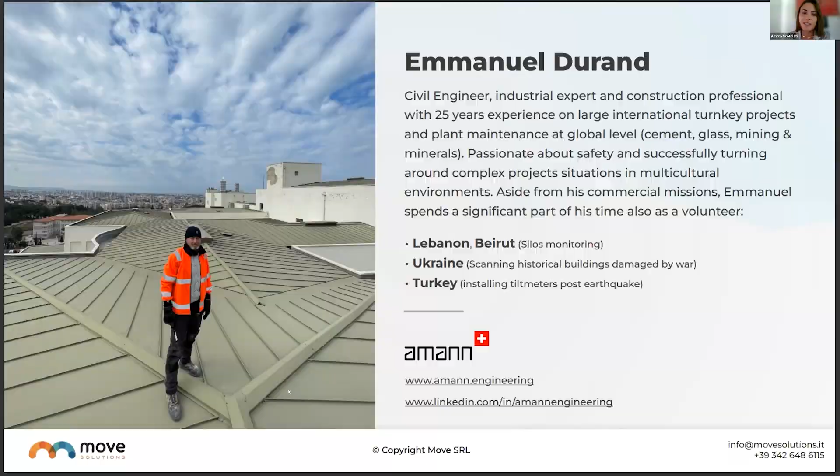Today he will go through the monitoring of the Beirut silos, and in particular why they needed to be monitored, how he decided to meet those needs, what instrumentation he used, and what results he managed to achieve.

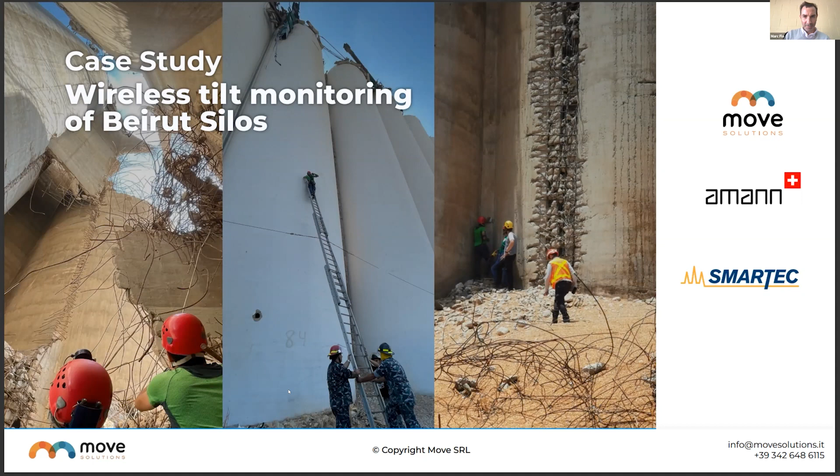Thank you Umbra, thank you so much, and thank you also Emmanuel. Let me share and we can then continue. Okay, is it correct? Yeah. Yes, that's fine, okay.

As you mentioned Umbra, I'm a sales manager for Move Solutions. I want to do a brief introduction of the company and what we do. Move Solutions is an Italian company that designed a wireless system for smart structural health monitoring. We provide the most innovative IoT solution for both static and dynamic applications on civil infrastructure works and needs, like general construction, bridge solutions, and railway or infrastructure monitoring.

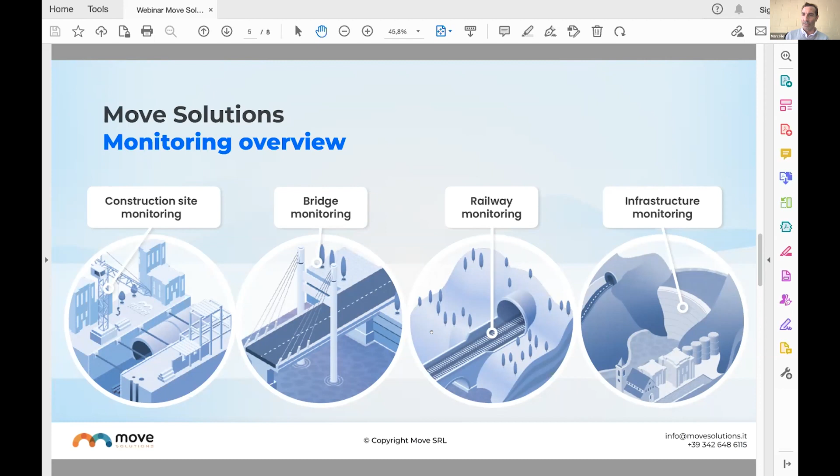We provide the hardware and the software, so we provide different sorts of wireless systems and sensors. We have a plug-and-play system for low-cost installation, and also low maintenance cost, as our battery lasts from 2 to 8 years.

About data analysis, as we will see later with Emmanuel's case study, we work in a very user-friendly platform with useful tools, functions, and graphs that really support in a very easy way all the data that we need to study in real time, real monitoring, and at the same time offer real-time alerts.

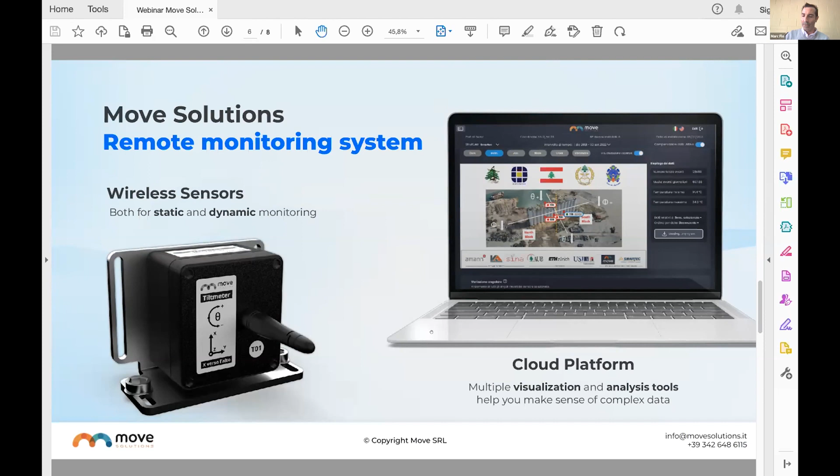As a system architecture, let's see this picture, where we can see perfectly how our system works. We have our sensors installed at the beginning. We work under the LoRaWAN protocol technology connecting to the gateway, and through the gateway we send all the data to our servers where we use our own algorithm to process the data, and then show all the data analysis on our own cloud platform.

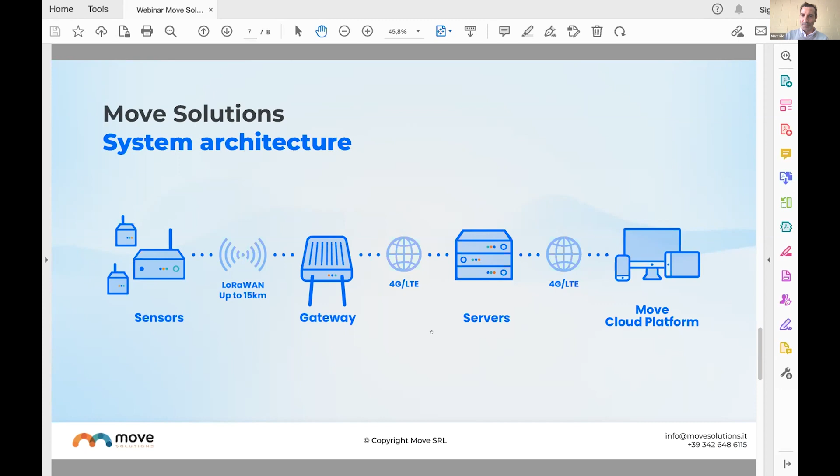We can also export the data from our servers with different kinds of connectors for specific integration into different platforms. So from my side, we can now go through the case study with Emmanuel. Thank you, Emmanuel, again.

Please. Thank you, Mark, very good presentation.

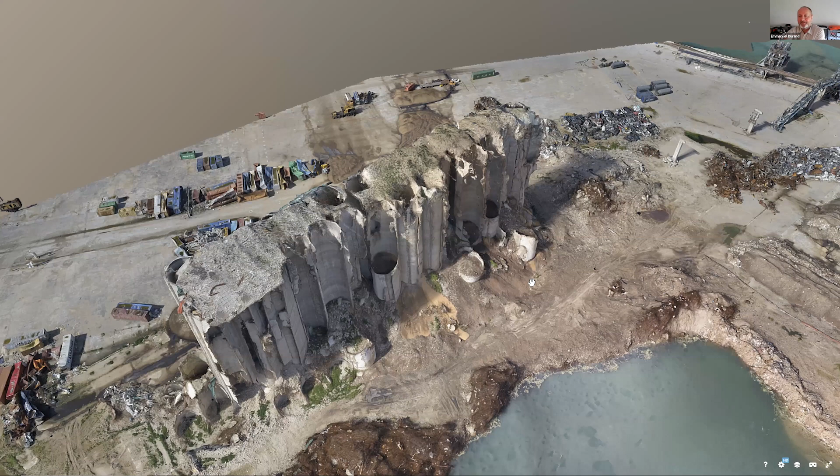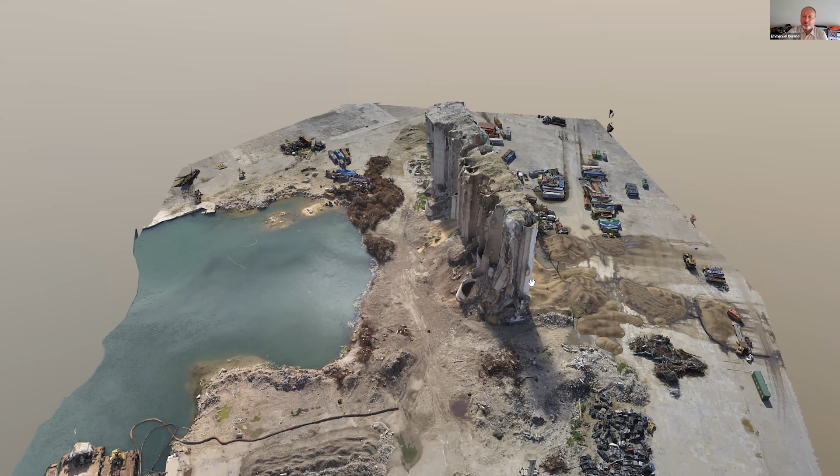Let me share my screen. Here you can see a 3D model of the port silos and the explosion site. Just to give a bit of background: on the left, this crater is the site where the explosion actually occurred. It was an ammonium nitrate explosion that affected the town, and for today's topic, it affected the silos. Actually, the silos acted like a shield protecting part of the city from the explosion. But as you can see, and as everyone has seen in images of this terrible explosion, the damage was really incredible.

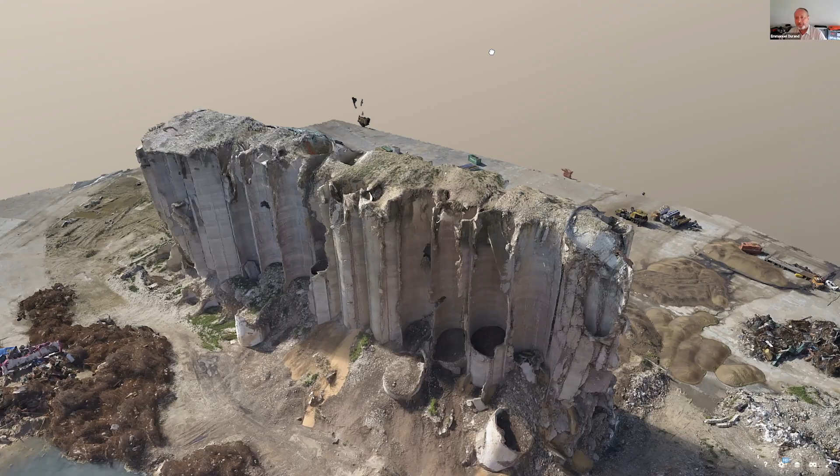When I first went to Beirut, it was not directly for the silos. I was working in town with a group of students providing support to the authorities. But then quickly, because this is my field and experience, I was in contact with the Lebanese army, and I offered to support specifically at the silo site with laser scanning.

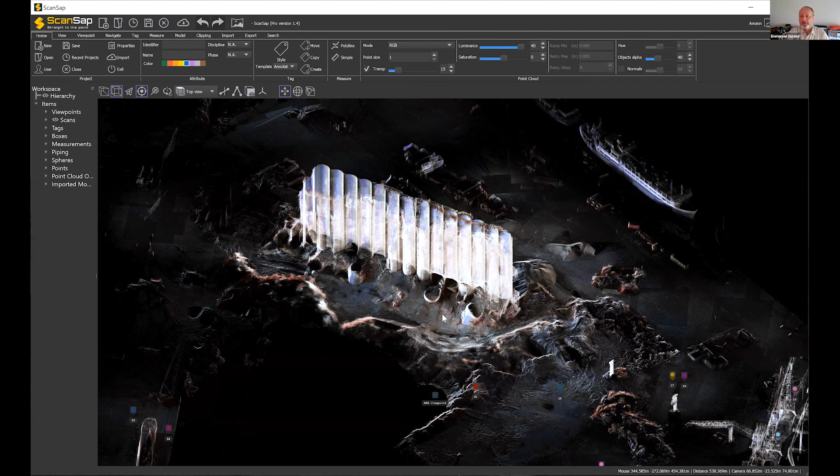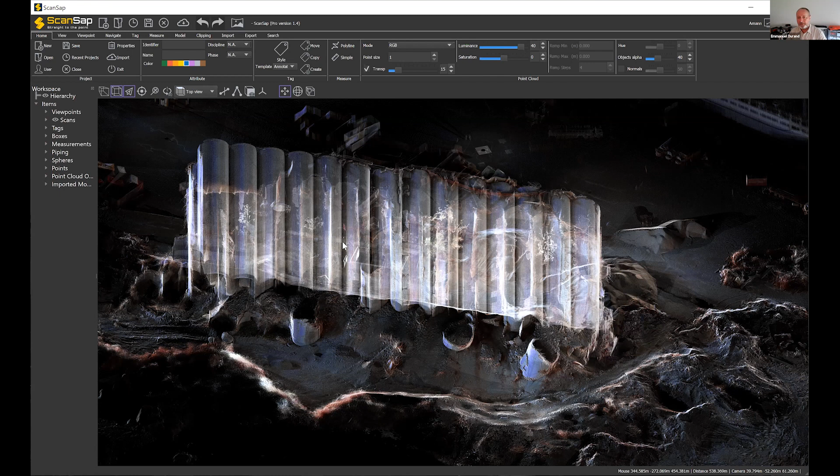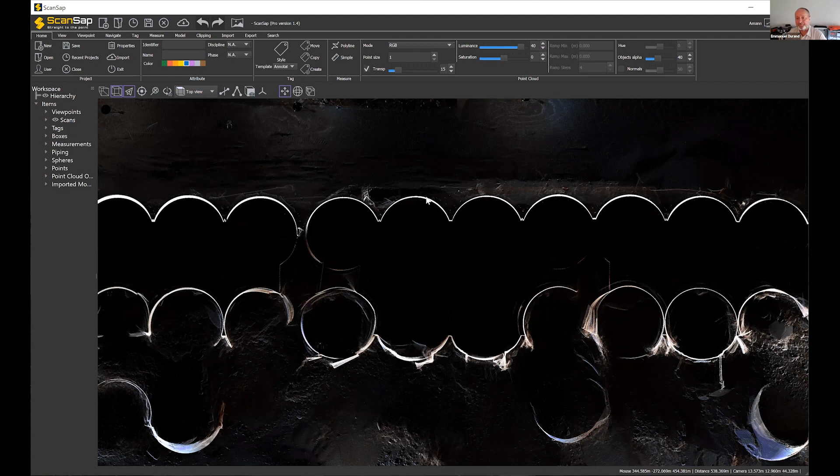This is a more precise technique of visualizing a particular scene. I use this laser scanner device, or 3D imager, positioning it all around the silo site and then combining the data together. When I did that, I found out immediately that the silos were not only damaged, but also got hit from the explosion, and were actually inclining, which we can see here—though I'd need another webinar to fully explain.

Basically, the silos we can see here in the plan view were like a body, or soldiers—I used to compare them to soldiers. We had 3 lines of silos, and the first line was totally destroyed by the explosion—it's this line here. The second line is the most visibly damaged. So all of this is moving. That's what I found at that time, just 3 weeks after the explosion.

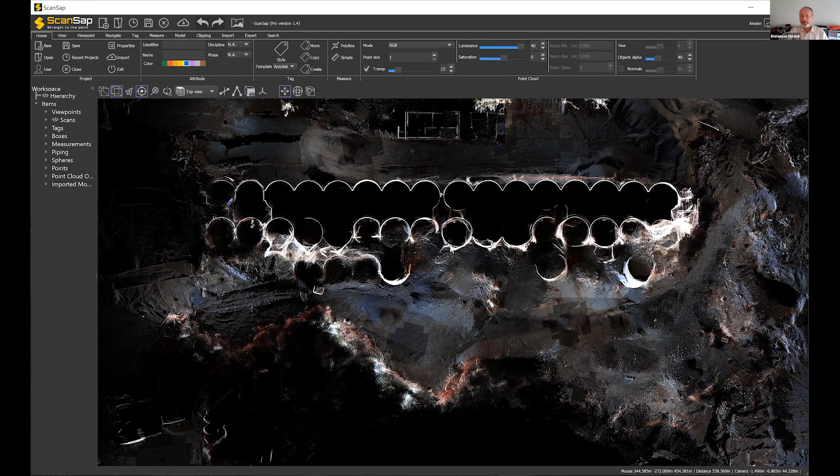From that point, as a structural and civil engineer, I knew it was important to follow that inclination. So I came back to Beirut multiple times, and I was elaborating reports for the group I was working with at that moment, with the Lebanese government, issuing reports such as this one.

Here again, I won't go into too much detail—it's a technical report, which I'm happy to share; it's public. But basically, what you can see in this first graphic image, based on laser scan, is showing the movement. At that time, I showed that the Beirut port silos, which were built in two separate phases like two buildings, had one part that was not moving over time, and another part, here on the left, that was moving, and moving fast—fast from a structural point of view, like a few millimeters of inclination every day.

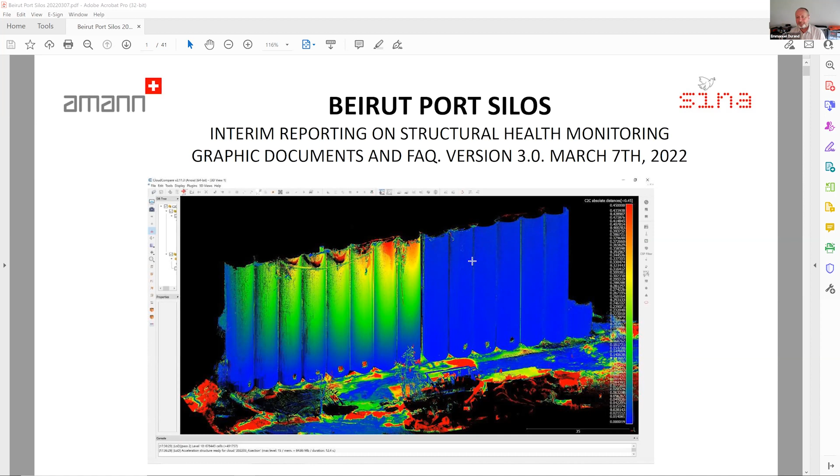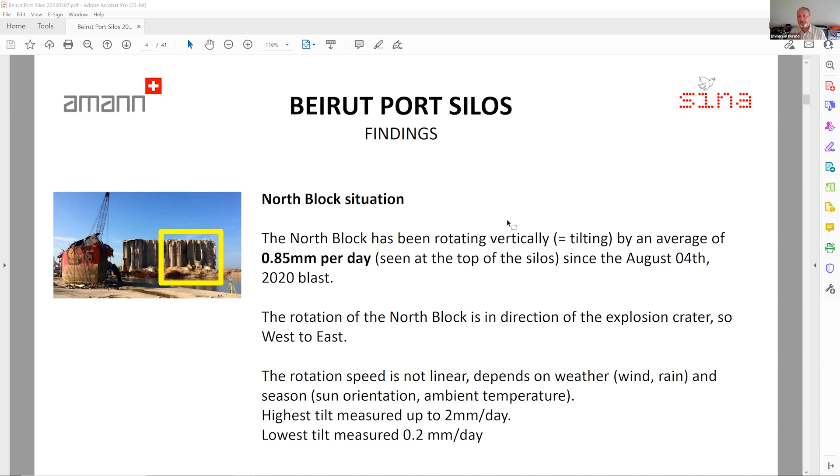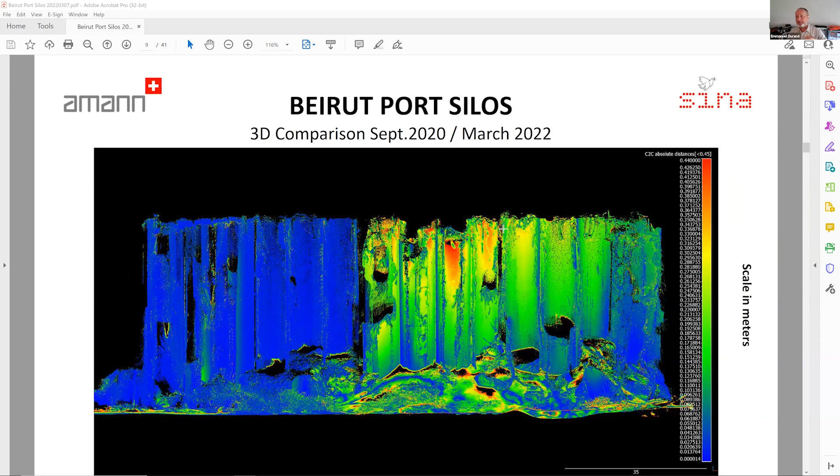From that point, because I wasn't able to come to Lebanon every week or stay a long time—my presence as a volunteer is always limited, I do the best I can, but I also have my family and my work—I kept traveling to Beirut, but I was also always looking for a system that could provide permanent monitoring, more precise, all the time, day and night.

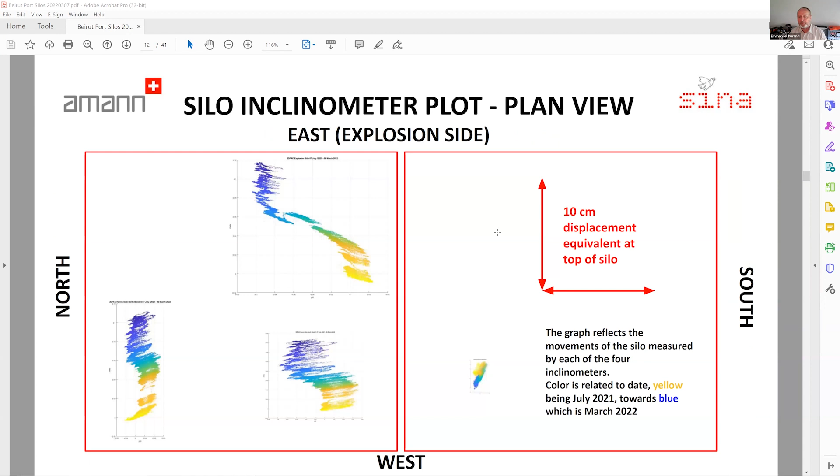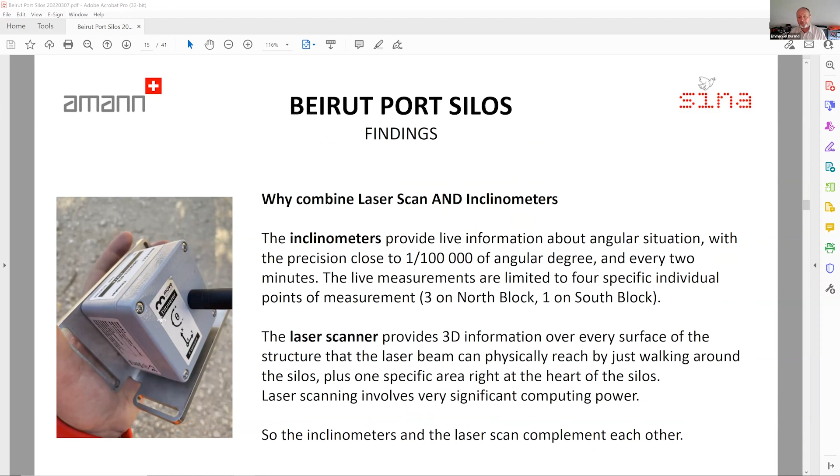I knew from school, and because that's my field of expertise, about inclinometers, but I had never used them in my professional work. I quickly got in touch with Move Solution through their partner Smartec in Switzerland, and we quickly agreed on 4 devices. You can see here the device, and then I installed it.

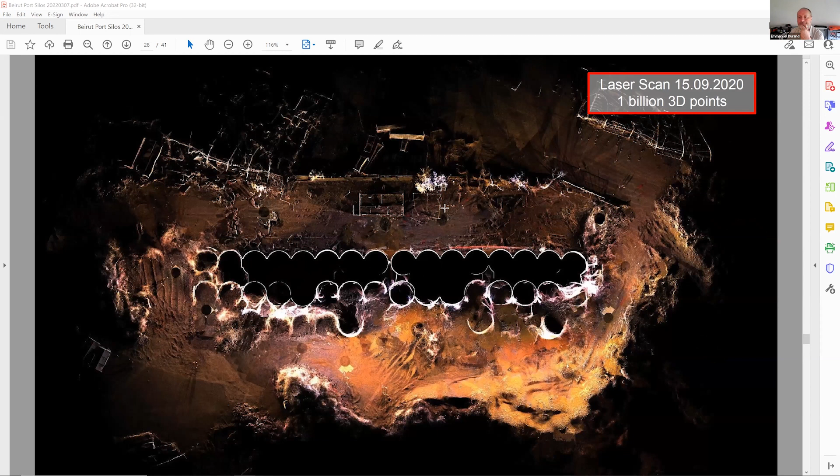So here I'll just go through the report—you can see these are graphic documents from my laser scanning, top view. Again, this is the view from the top; I made this one just right after the explosion. Different graphic documents here—this is the section of the building, and I explain in this report why the silos are tilting.

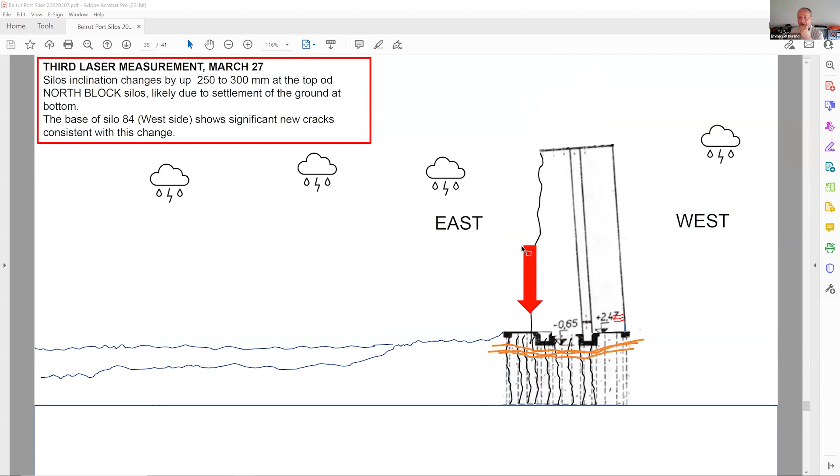Then we come specifically to the cloud platform. What's very important to understand is that the sensor—in this case, the triaxial tiltmeter from Move Solution—is a totally autonomous device. It doesn't need any cabling, doesn't need any external source of power. I'll show some pictures after. Basically, you just need to fix the device with some special screws to the structure, and that's it. The device emits a signal of inclination with a precision of almost one hundred thousandth part of an angular degree, which is just incredible precision.

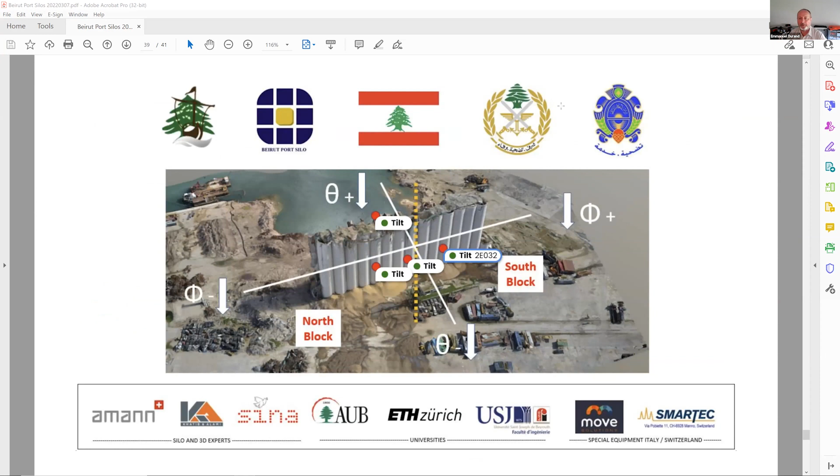And actually, it is still working in Beirut because it lasts so long and it really crosses any building. In this case, it's sending the signal to a router we have in town in Beirut, and the router is about 1.2 kilometers away, and we have no disruption of signal. So it really works very well.

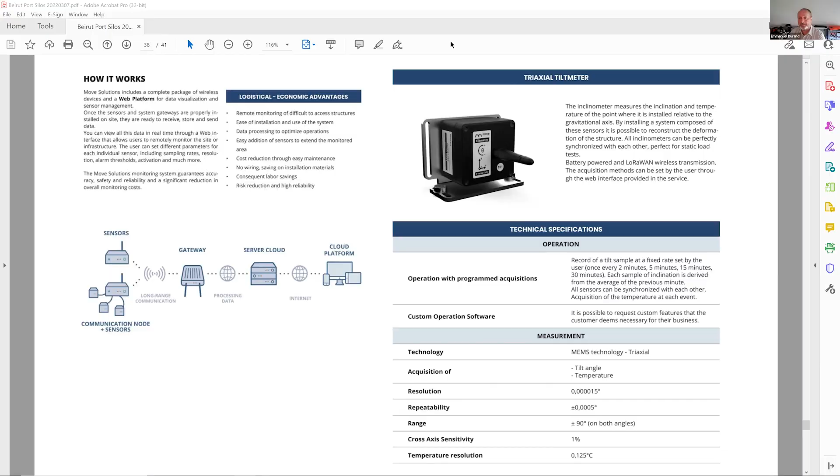And then the router, which is in town, needs some power supply, or it can also be powered with a solar panel in some cases. And it has a SIM card inside. So the router will receive signal from any kilometer and send it to Italy. Why that? When it sends to Italy, then we can get any signal directly on the platform, on the Move platform, which I will show now.

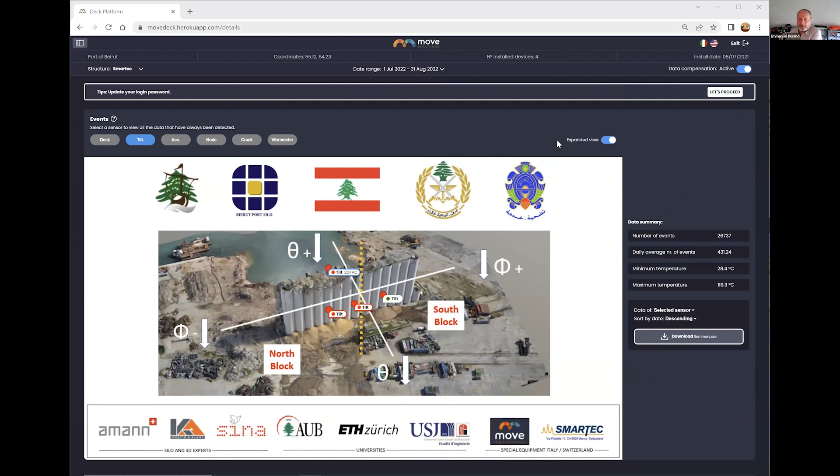So in this screen, you can see, actually we are live on the screen now. And on this page, we have all the different actors. So this is the owner of the silos, the Ministry of Finance, Beirut Port Silos, the state, and these are army components, the Lebanese army and the general security. They have been providing us with a lot of support for the installation. And then all the different actors from Amann, local and foreign universities, and of course, Move.

So here we have our different sensors. I installed 4 in Beirut. We have them here, and to get the signal, we just click on every signal. What's important here is we can see, for example, on this one...

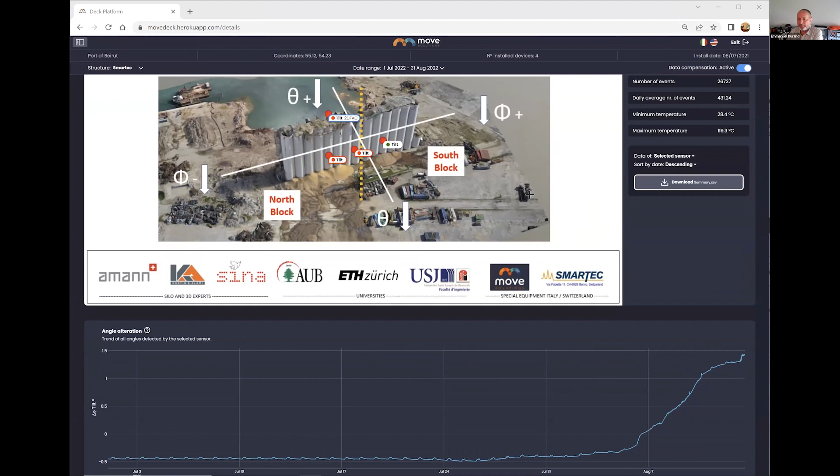The sensor was really key in identifying the problem in the silos and the acceleration of the tilt, which is exactly what I was suspecting. So I decided to install the inclinometer because my laser scan measurements were showing an increase in the tilt, as I said before. And when you have a tilt, you always try to find out whether it is stopping, or on the other way, accelerating. As civil engineers, we worry about an accelerating movement, which generally precedes a collapse.

And that's actually what happened in Beirut. We can see on this sensor here in July, okay, it's very small, but we can see here the angle. So we have 3 graphics. The first is inclination, like this. The second graph is the inclination in the other axis. And then we have the third graph, which is temperature, the temperature of the structure in contact with the inclinometer.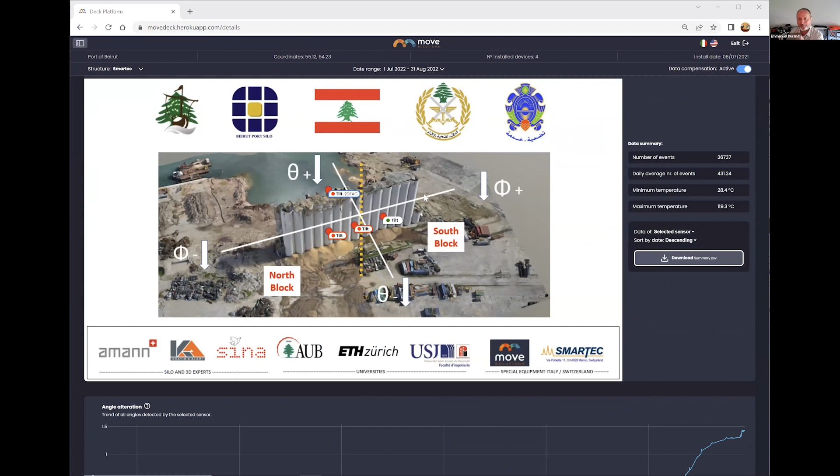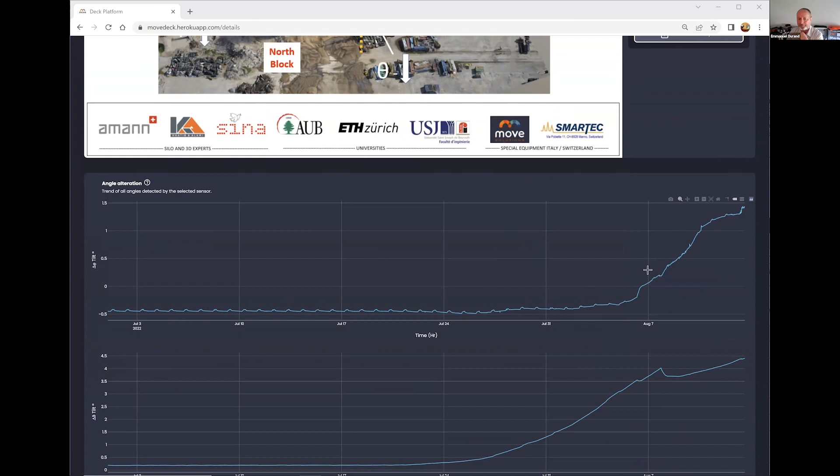So in Beirut, we have 4 sensors, and every one of them is a story in itself. If I go quickly, this one here is on the crater side of the silos. And we can see here it was getting up and up the signal until at some point the silo reached 4.5 degrees here, which was already very, very big. That's already more than the Pisa Tower.

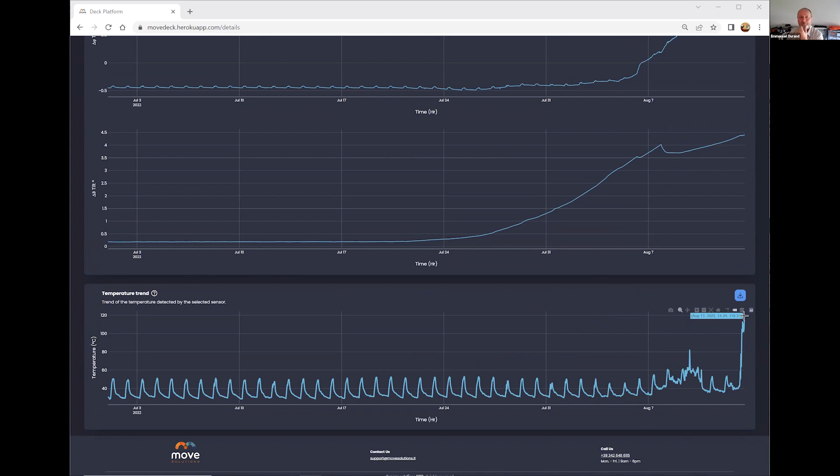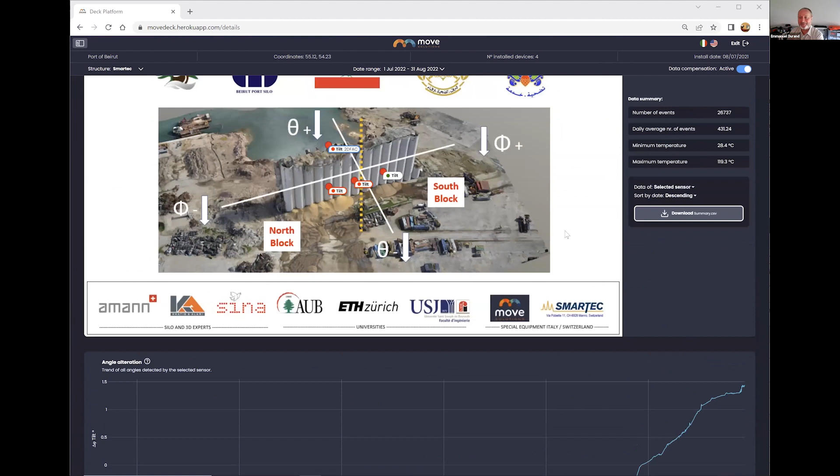But what's interesting here is we had the temperature, and we can see it reached 120 degrees because unfortunately this sensor burned, as there was a fire at that time. So this sensor died, but it did the job until it died.

And then we have this sensor, extremely interesting also. I'm just loading now. You can see the loading is quite fast. Here, this is the angle. We can see in July last year, we had like 0.02 degrees, 0.02, very small, but still going up. And then at some point, the inclination starts going to 1 degree, 2 degrees, 3, 4, really fast.

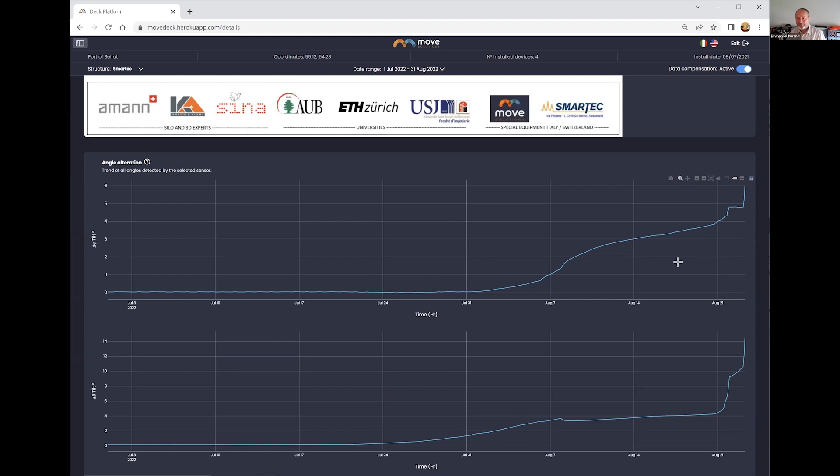So it's actually, and we can see an exponential curve on both angles, either on this side or this side. So you can see the first curve here or the second curve here, especially in the last moments, that's the last night. You can see here this 0, 0, it's midnight. And between midnight and here, it's 6 o'clock, it went from 10 degrees to 15 degrees.

Then you know it's finished and you know it's going to go. I will not show here, but you can see on the internet—just search Google for Beirut silo collapse—and you'll find videos. There are so many videos with the live collapse of the silos.

What is very important to say at this point of the discussion is why we are doing all this and what's the benefit. In this case, in Beirut, the benefit of all this structural health monitoring—first with the laser scan, but then with this day-to-day, minute-per-minute monitoring with the Move Solutions tiltmeter—is that I was able to tell the authorities with certainty, 100%, this is going to collapse. So please remove any people in the vicinity.

When the silos collapsed, we actually had 3 successive collapses: on 31 July, on 4th of August, and on 23rd of August. Every time I was able to warn the authorities and they were able to secure and evacuate the area. So the silos collapsed, but no one was killed and no one was injured. That's really the benefit—it's really a life-saving tool. On the technical, scientific point of view, there are many other benefits, of course, but this is really the key.

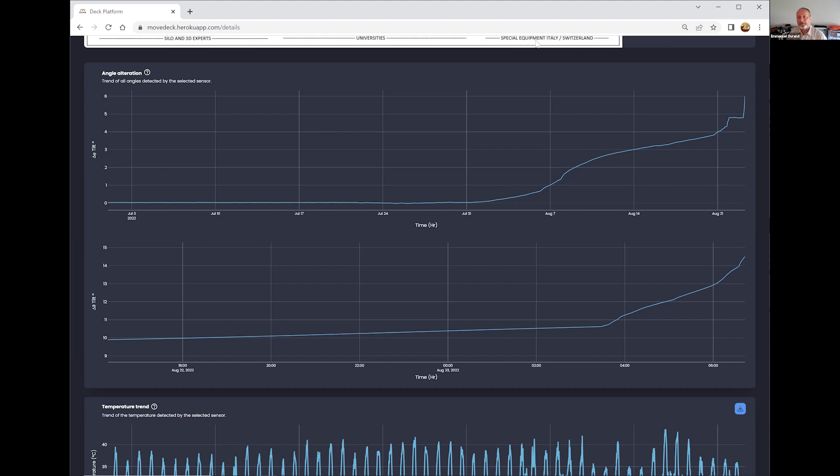Just recently I installed, again—we will do another webinar for that, I guess—a tiltmeter in Turkey on hospitals, and here also it's a life-saving thing. I will just finish by showing some pictures from the installation, which is also something I can share at a later stage.

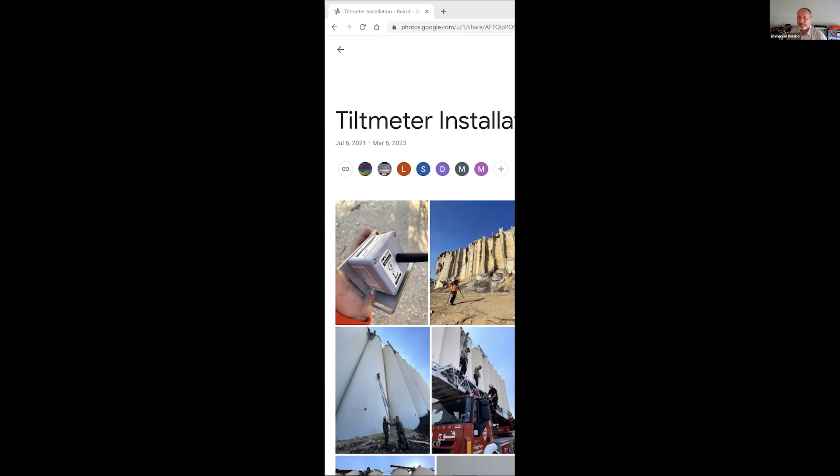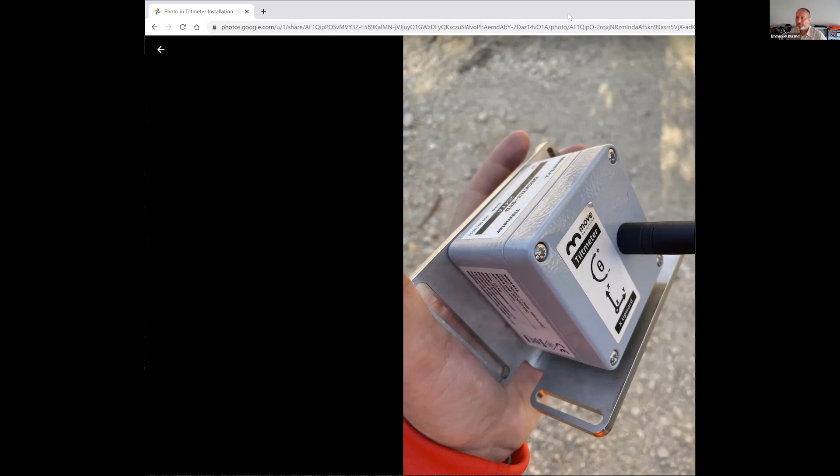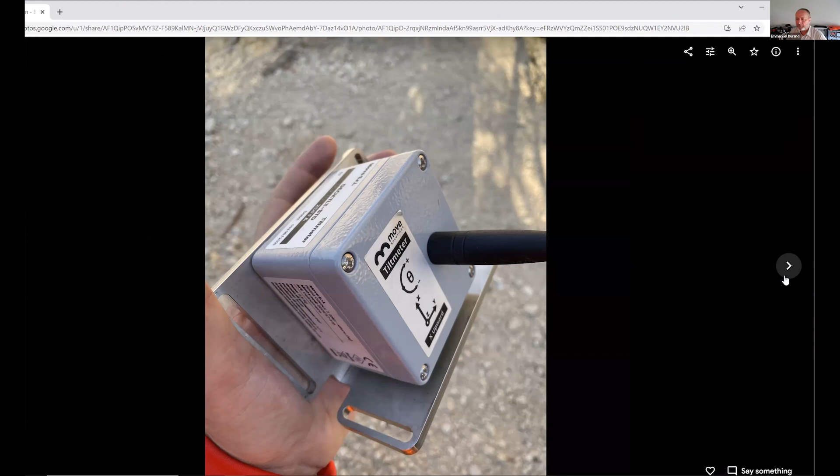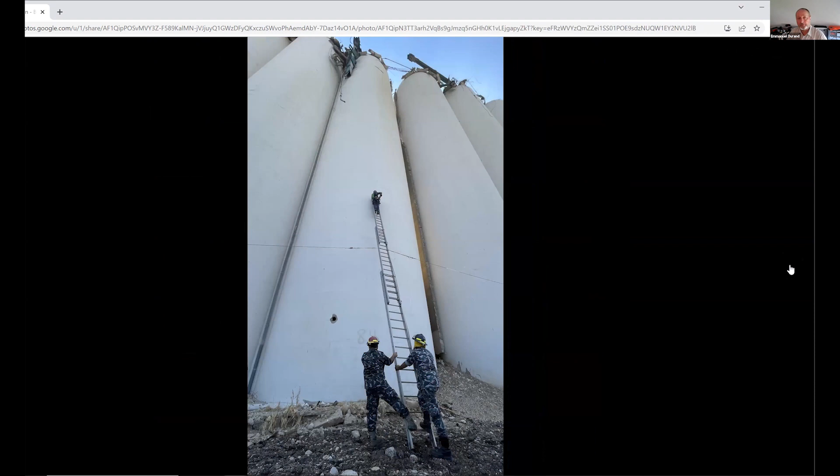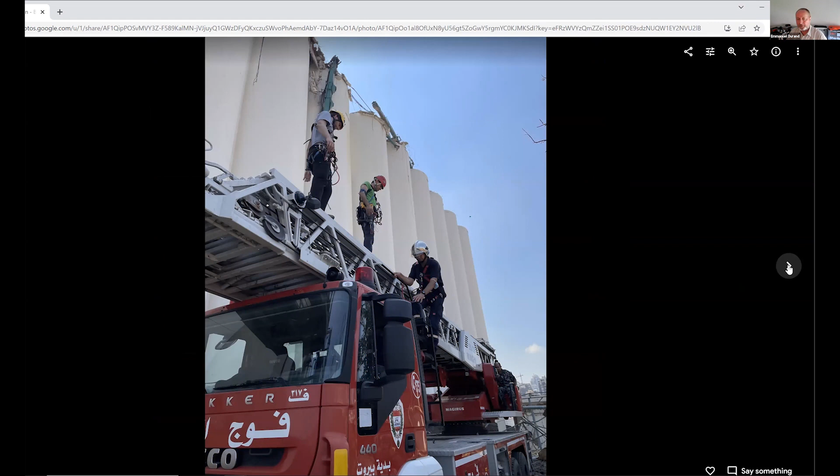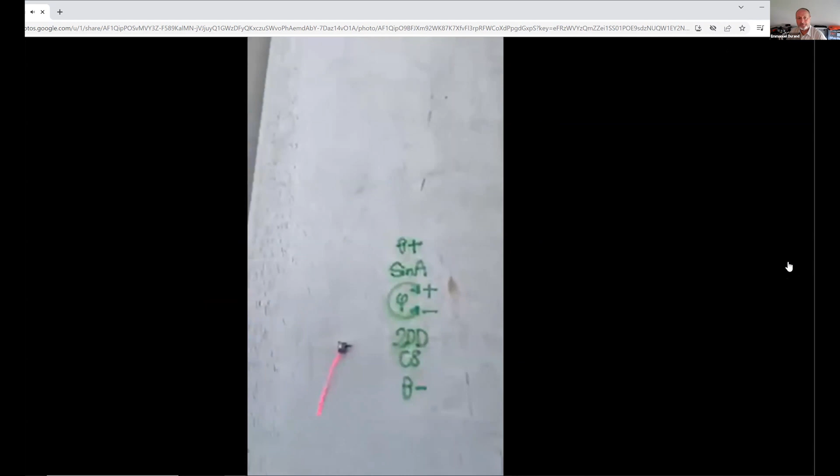I was able to get the support from a speleologist of Beirut to help me install, together with the firemen of Beirut port. They brought the truck as we needed to install the system at height, so we used that big fireman ladder—worked for me. Here we install on the wall of the silo; installing directly on the very top would be dangerous. We installed about halfway, which is enough because again, we are measuring angle.

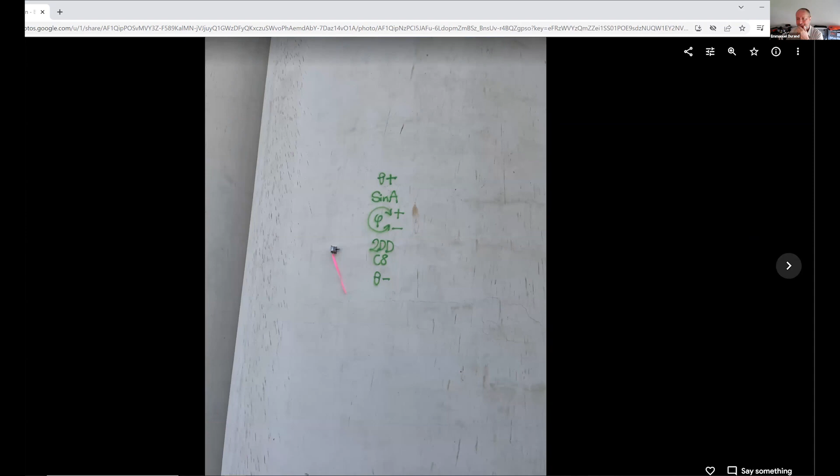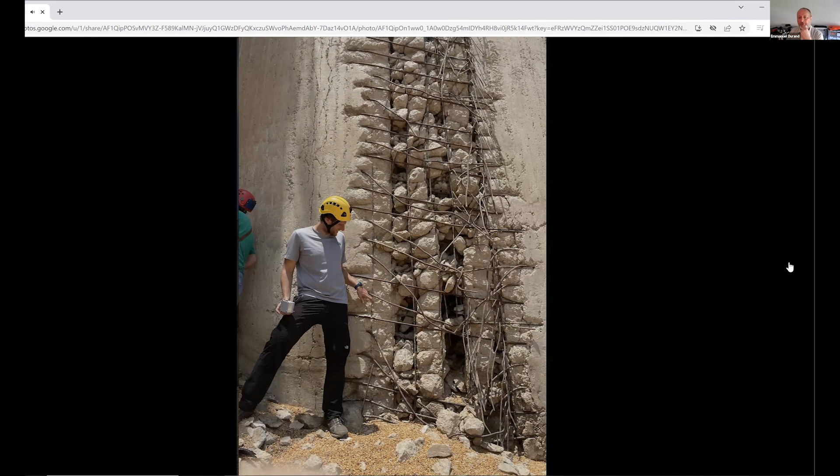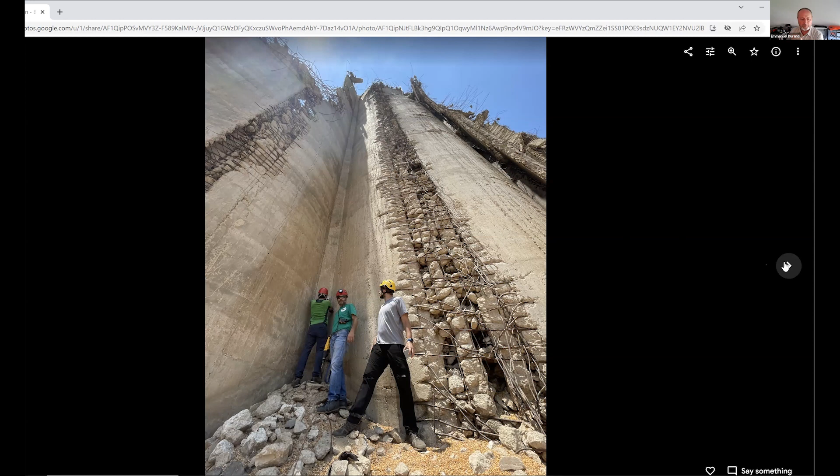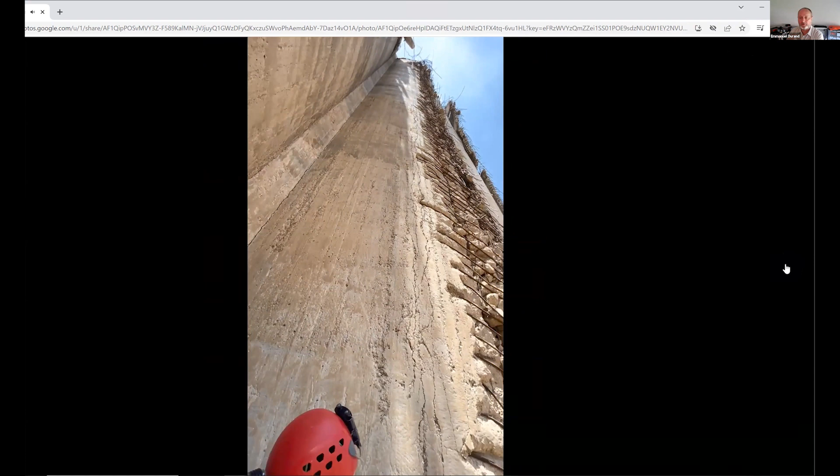So, more pictures here. You see it's a very complex situation, especially on this side. We were directly under rubble, and actually some small material was falling because the silos were moving. Everything was done under control, because I know from experience and observation when we can go or not. So we went quickly, but the good thing is the system is really easy to install—it takes about 5 minutes.

So we went quickly with lots of control installing, and then we went away. This is at the end of this installation, with the support from the firemen. So that's what I can say about the system—it's really a life-saving device. It worked incredibly well, easy to install, and I'm really thankful to Move Solutions and all the partners involved, the Beirut firemen and my friends there. We were able to make it and save lives.

Yeah, I'm sure. Thank you, Emmanuel. Back to you. Thank you so much, Emmanuel.